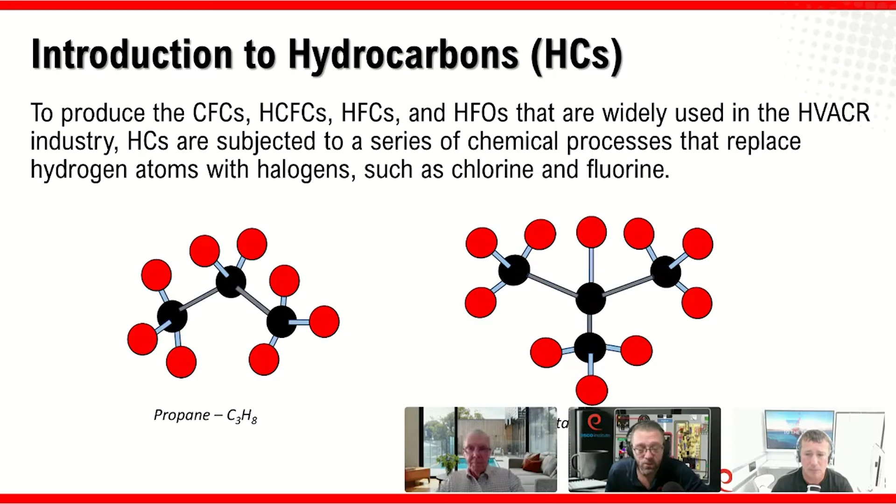So in a lot of these refrigerants, you're going to see two of the primary components in the refrigerants you're using today, carbon and hydrogen. The only difference is some of those hydrogens have been replaced with fluorine, which does bring down the flammability, but it does raise the GWP. If you leave the hydrogens in there, that's where we run into the issue. Okay, now we have flammability, right? But we do lower the GWP of the refrigerant. This is a more natural form of each of these substances.

But I do want to make abundantly clear, this is not the same propane that is in your grill in the yard or the same isobutane that is in your cigarette lighter. They are refrigerant grade chemicals. They have been purified to AHRI Standard 700, so they don't have any odorants. They don't have any other contaminants in there, no other hydrocarbons. If you were to look at the two under an electron microscope, regular propane and refrigerant grade propane do not look very similar to one another.

Okay. That's good to know. Meeting the purity standard is critical. Exactly. Because if it doesn't meet the purity standard, there's going to be moisture in the refrigerant, and all of a sudden it's going to be contaminating the system and causing corrosion inside the components. So, for example, propane has multiple grades. You could have heat or fuel grade. There's a chemical grade. There's a refrigerant grade. And what changes is the percentage of impurities that are removed, correct?

So in its naturally occurring form, you may have other hydrocarbons present, or you may have mercury or some other chemicals that are present in there that have to be filtered out. And again, depending on what it's being used for, it could be heat grade where we're burning it. It could be chemical grade. It could be industrial grade, or it could be refrigerant grade.

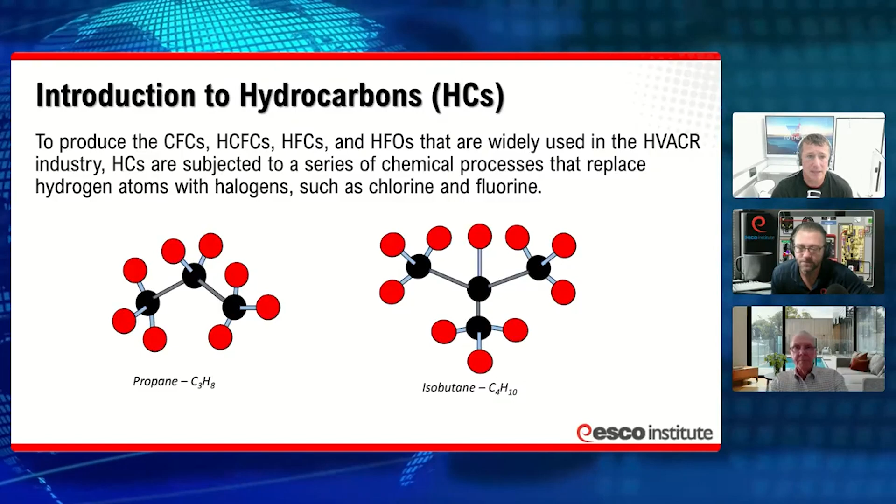So a lot of research, a lot of science, a lot of safety precautions have gone into this, and that's why we need to know what the safety precautions are. And that was really the goal behind this project, to prepare us for safely handling, working on, and disposing of these next generation of refrigerants.

So there's no federal requirement that says you need to take this training on this refrigerant. Right. There's no restriction like we have with our 608 card to buy all of the CFCs and the HCFCs and the HFOs. You don't need that for propane. These are exempt refrigerants. It would behoove you to obtain some sort of training before you start working on this. I mean, it could end very badly for you. Yeah, there's plenty of videos online of that happening.

So we're trying to say, listen, here's the information. Here's what you need to know. We've done all the research. We've got cooperation from the manufacturers, and we're trying to present it to you in a manner that you can take it all in and say, okay, I feel comfortable now.

I would say the goal of this is to quench the fear. If you're working with electricity, you shouldn't fear the electricity. You've got to respect it. That's the safe way. Same thing with this refrigerant. When you see the big scary sticker on there, you can't have that fear, or you're going to make a mistake. So we want you to feel comfortable with this.

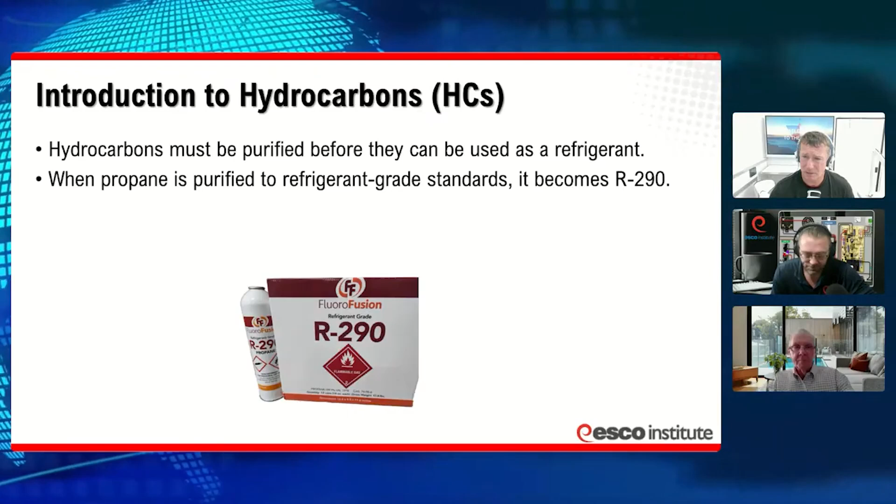Yeah, because especially in commercial refrigeration, even a lot of our smaller ice machines, I think under 250 or 300 pound, they're all going A3. All of your ice chests that sit out in front of gas stations, the Leer ice chest, I talked to Leer some months back, and they're all A3 highly flammables now. So the hydrocarbons really are moving into the refrigeration sector quite rapidly.

Yes, when you walk in to work on a system that's hydrocarbon based, the leak detector should be turned on before you even walk into the building or the space where the unit is, because if there's any leak, it will start to detect it. The leak detector should not be shut off while you're working on the equipment, so that you know there's been no problem with any leaks while you're working.

The other issue is these are heavier than air, so they're going to collect along the floor and in low places. True, I hadn't thought about that. They're not going to naturally dissipate like natural gas would. Right. These refrigerants are going to collect on the floor. So some sort of mechanical ventilation with an intrinsically safe fan to move air through there. There was actually one case manufacturer, I believe from Europe, who decided that to prevent collection, they would leave the condenser fan running all the time. Makes sense.

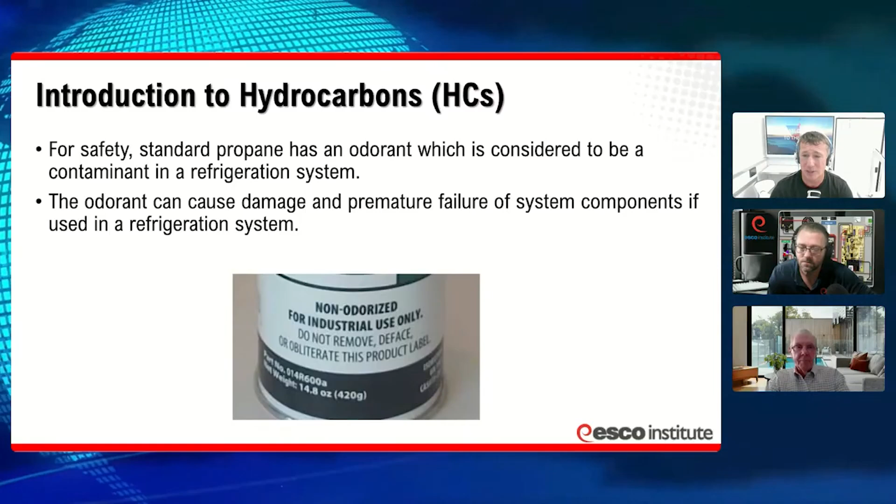Jason had his own experience with people not understanding the flammability of refrigerants and not understanding the quantities of refrigerants, and ran into a scenario where he wasn't even allowed to work on a piece of equipment inside of the building. They wanted it outside, they wanted it out of view. And that's not really the case. Understanding what the actual safe handling and safe practices are is what will get us all forward.

I will point this out though, that there are a lot of spaces still today. If you have a 290 system, a 600A system, let's say a college campus, you have a cafeteria, you have the kitchen, and you have these refrigerators and freezers. And if they're 290 and they need to be repaired, there's still a requirement that your company come pick it up and take it off location, repair it, and then bring it back.

They don't let you fix it on the location, which I find pretty funny because the person that's going to load it onto your truck is driving a forklift that has a 30-pound tank on the back that they're burning, correct? That's right. There's 2.6 ounces in this unit. But a lot of the college campuses and certain data centers and places like that, they have a requirement where you come pick it up, put it in your truck, remove it, leave a loaner possibly while you work on the unit, and then bring it back.

Yeah, absolutely. One of the questions came in from Paul is, what is the max charge in a unit currently? I know there's some information on that later in the presentation. So we've got to be a little more specific. Are we talking an open case, residential, commercial? If it's an open commercial case, you're allowed 494 grams, which is 17.4 ounces. A little over a pound. I just opened the book next to me. It's still quite a bit of refrigerant.

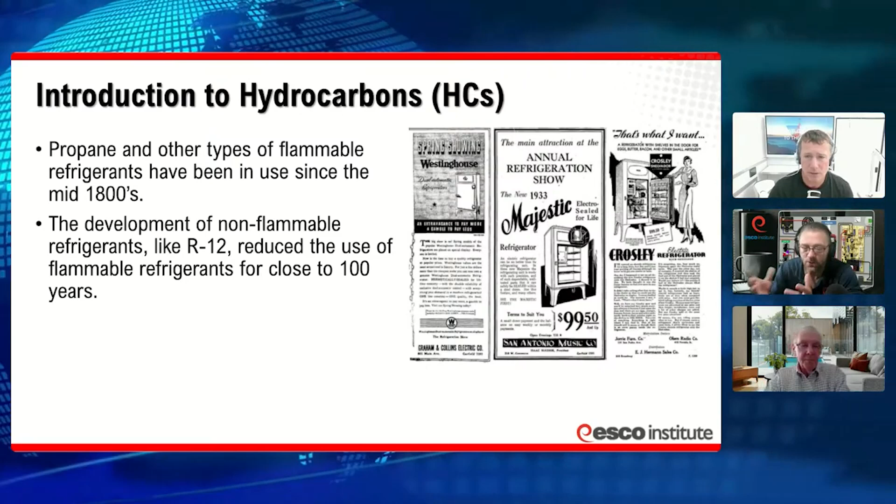So you're right, it does really matter. The controls have to be intrinsically safe and certified to work with those refrigerants. If you're below the lower flammable limit or above the upper flammable limit, it won't ignite. So you could have an instance where there's been a leak and it's been contained and you're way above the upper flammable limit. Then all of a sudden you open the door, and you've changed the mixture inside that cabinet by introducing air. So you have to be very careful to use the proper controls.

Yeah, we've actually had quite a few reports. I did some research probably 6 or 8 months ago on some residential refrigerator explosions around the country. And at least on 2 of the ones I researched, the evaporator fan motors had been replaced by a contractor with non-intrinsically safe motors. They just put in standard shaded pole motors, which had enough arc on startup to ignite the gas leak in 2 of them. But those were systems that had leaks and had wrong parts on them.

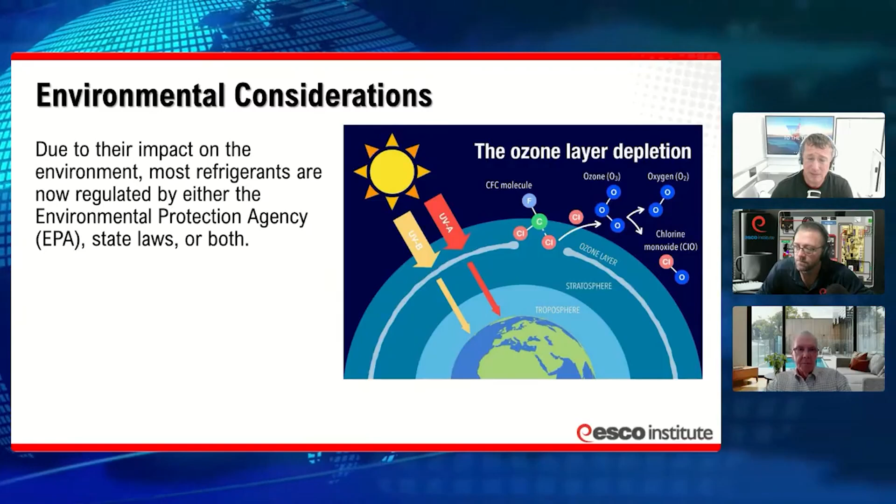The chances of finding that are slim, but all it would take is one improper repair, installation, or service, and then we do have some of those potential issues. And as we mentioned previously, one of the main reasons we're looking at lower GWP or natural refrigerants, including CO2 as well as these highly flammable A3s, is the environmental impact. Looking at ways to use more environmentally friendly refrigerants. So going forward, we're going to see a lot more use of these natural refrigerants.

So you're looking at 600A and 290 for a bulk of this. Yeah, a lot of these other refrigerants, those that we are very common with, are, if not already gone, on the phase down. You got to remember, we are in an HFC phase down currently. We will be through 2036. In 2028 will be the next step. So at the end of 28, January 29, we'll be taking that additional 30% step.

That's a cliff right there. That is the cliff that everyone's worried about. Yes. Exactly. And so that just really gives us a few years to make a pretty swift transition into other refrigerants, because some of these higher GWP refrigerants like R22, gone, hasn't been made since 2020. R134A, out the door in residential, in automotive, in refrigeration. 404, out the door. That was our low temp freezer refrigerant.

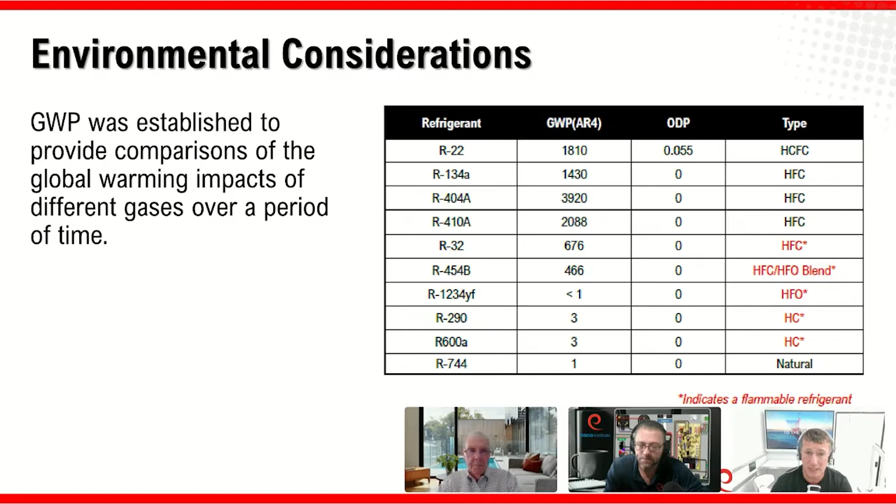They've been out for a very long time, since the 1960s in some of them, but we haven't utilized them as standalone refrigerants and blended refrigerants until recently. So we're doing a lot of watching and monitoring to see how the HFOs actually do long term. But a lot of those are A2Ls as well.

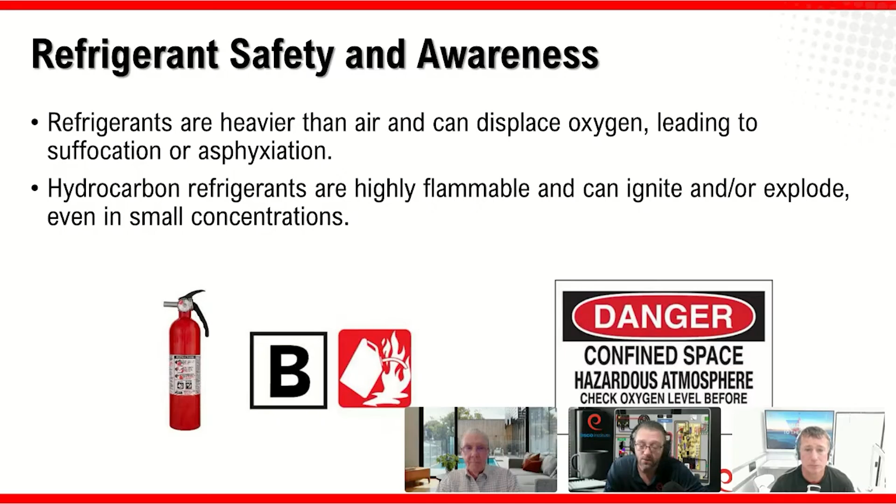Exactly. Yes. So moving forward, most of the refrigerants that we're going to deal with are going to be flammable in one form or another, either A2L or A3. You have ammonia, you have CO2, 290, 600A, and a lot of the HFOs like 1234YF, they all have some degree of flammability. Mm-hmm. Yeah, absolutely.

And for those that are not familiar with the word intrinsically safe, I know we've been using it a little bit more over the last few years in the residential applications as we move into A2L training. As we move into these A3s, it's very important to understand what that means. So an intrinsically safe component is something that is tested and certified that it can't be an ignition source in a flammable atmosphere.

So any kind of motor, any kind of contactor, anything that's certified intrinsically safe, all of the arcing, all of the contacts are sealed in some sort of enclosure to where even if there was a natural gas or a propane leak, it could not cause ignition, which is why when you were talking about the refrigerators earlier, when they swapped the motors out, that motor just turning on was enough to ignite it. But an intrinsically safe motor, everything's in an enclosure and it can't be an ignition source in a flammable atmosphere. That's what intrinsically safe means.

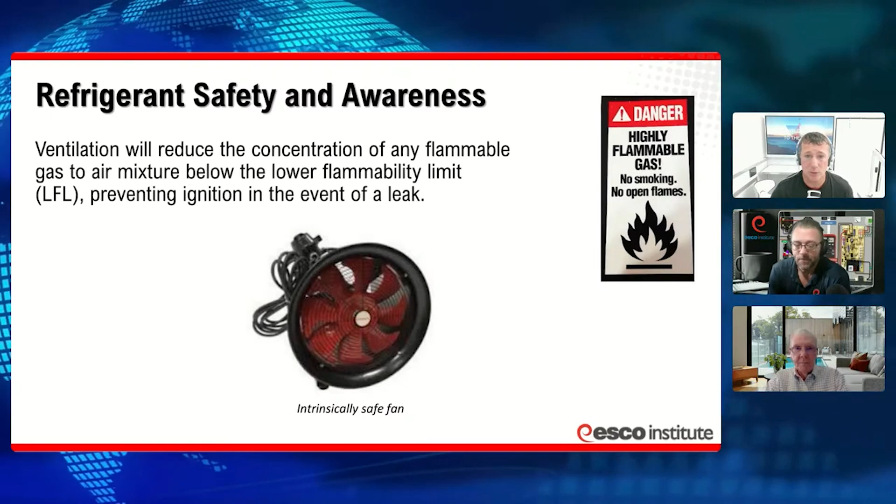Awesome. Yeah, thank you for that, Jason. I just think it's a very good point to bring up for those who may not understand what that actually is.

This is what Murph was talking about. Yeah, this is what I was talking about before. If you go into a work area, you have to have your leak detector turned on. We have refrigerants that are heavier than air. They can fill the room. But with the amount of refrigerant that's going to be used in these particular 290 cabinets and 600A cabinets, it's probably not going to reach the lower flammable limit, depending upon the space that it's in.

But you still need to have the leak detector on, because if you're starting to work on a piece of equipment and the condensing unit is on the floor and you lay down on the floor next to it and it is in a small, let's say, storeroom, you could wind up being asphyxiated.

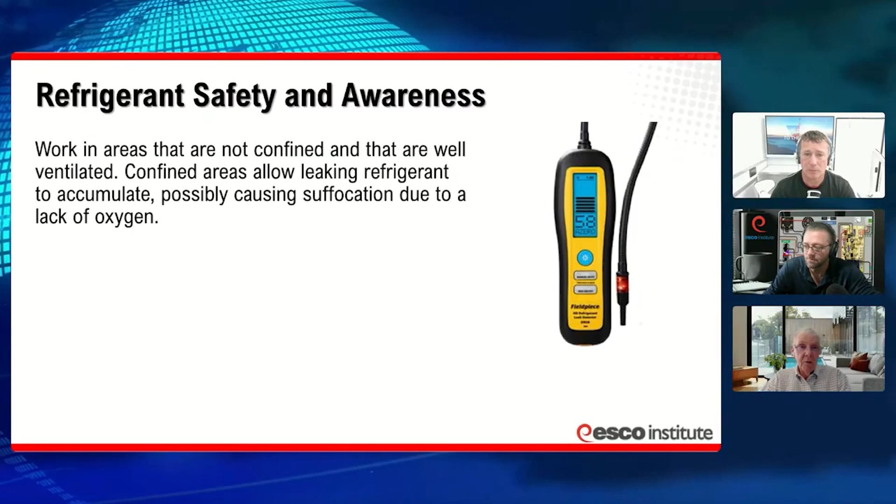Exactly, because you're breathing in nothing but the propane. So the first thing you do as a safety factor: before you walk in the door, you turn the leak detector on so that it's sniffing regular air. And as you walk into that room, you're going to get any leaks that may be there. It may have already dissipated, and when you get to the unit and tap into it, there may be no refrigerant whatsoever, and the leak detector's never gone off. Right, and it actually served its purpose.

I've talked to quite a few different tool manufacturers in the last few months, asking what they're doing to prepare for this, and it was interesting. I'm glad Paul mentioned the leak detectors earlier, because some manufacturers decided they're going to produce a different leak detector with different parameters than their combustible gas detector, designed more specifically for the lower LFLs of the A3 refrigerants. Other manufacturers decided to incorporate that sensor into their new refrigerant detectors so that it covers all classes, A1, A2, A2L, and A3. So it will depend on the manufacturer.

We've been throwing around the words A1, A2L, A3. What does all of that really mean? This comes from ASHRAE Standard 34. A and B are for toxicity: A is low toxicity, B is high toxicity, and the flammability is the number 1, 2L, 2, and 3. So if I'm a refrigerant manufacturer and I want to sell a refrigerant to the public, the first thing we do is send it to ASHRAE, and the first thing they do is set it on fire.

I mean, that's a job that I probably would be good at. That'd be good fun. Yeah, that's something I think I would want to do.

But they're looking at things like burning velocity, heat of combustion, LFL. And based on how it performs in the flammability test, it gets grouped into one of these buckets. One thing I like to point out is that ammonia is a B2L, B for toxicity. When I say ammonia, the first thing that comes to a lot of people's minds is, oh, that's toxic. Yes, it is. But it could also be flammable. It's a 2L refrigerant. When we classify these refrigerants, it's which hazard becomes acute first, and it's the toxicity that becomes acute first.

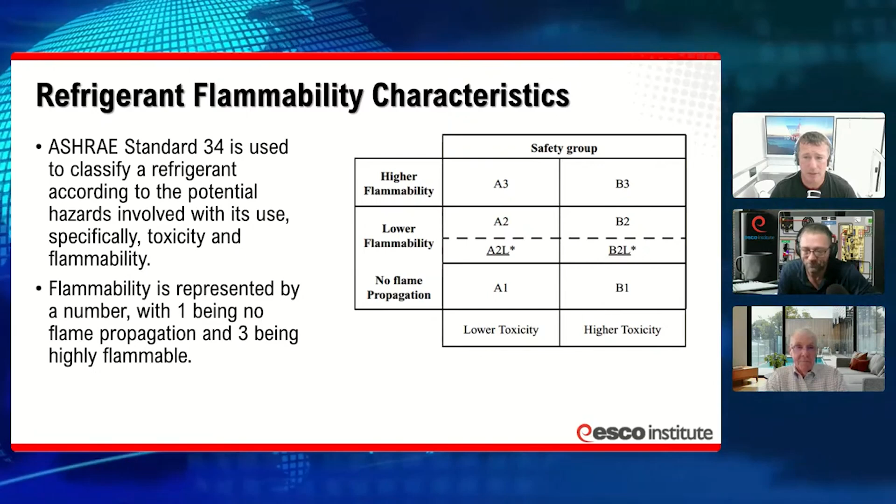So we have been working with a version of a 2L refrigerant for quite some time, because ammonia has been out there for decades. I don't think they ever stopped using ammonia. No, that's a 100+ year old refrigerant. And it brings up another point I thought we should mention real quick.

Another reason we're seeing so many more applications of these A3 refrigerants comes down to what the manufacturers can produce. If I'm a refrigerant manufacturer, I'm given, as Jason says, a piggy bank of GWPs. This whole phase down is not based on pounds of refrigerant. It's based on GWPs as a physical component, as a noun. So manufacturers of refrigerants and equipment look at what will be most cost effective for the end consumer. So yes, we're increasing the flammability, but we're generally able to reduce the cost of the refrigerant significantly over previous generations.

We would have seen 134A in a refrigerator a few years ago. Very common refrigerant for medium temperature applications; I've seen it in some low temp, but primarily medium temp. Most refrigerators, residential or commercial, used 134A. Now, if we look at R290 with a GWP of 3 and 134A with a GWP of 1,430, as a manufacturer I can produce a lot more R290 than 134A. Prime example, 744, CO2: I could produce either 1 pound of 134A or 1,430 pounds of 744, based on the GWP allocation.

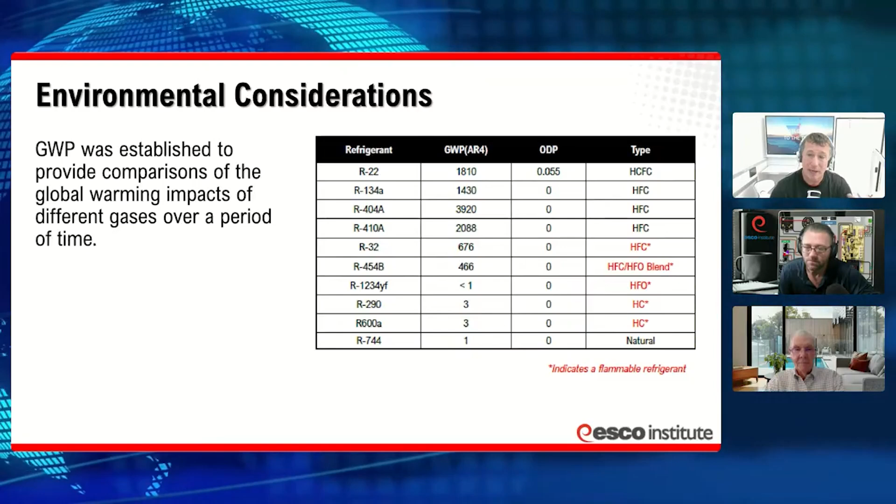So the cost of the refrigerant is typically lower as we get into the lower GWP, especially these naturals. I think it's important for people to understand that it's not based on pounds of refrigerant. It's truly based on GWP total for the chemical manufacturers. They get a deposit into the bank of these credits, and each tank of refrigerant they make is a withdrawal from their credits. And the amount of the withdrawal is the GWP. So if I make 290, it's a withdrawal of 3 credits.

If I make 134A, it's a withdrawal of 1,430 credits. When I'm out of credits, I'm done making refrigerant for the year. So as a manufacturer of refrigerants, I have to ask, okay, what do I want to make? What can I make, so that I have enough credits to produce refrigerant until the end of the year in sufficient quantities?

It's up to them how they want to spend the credits, but that is essentially what they're doing. They have to plot and plan how they want to spend their credits to make these different refrigerants. And as you said, you can make way more of this one than that one, and it keeps the cost down.

Sure. And this is a good chart that shows us some of the different refrigerants that fall in some of these classifications that we were just talking about. As you can see, we'll see those R290 and R600As up here as low toxicity, high flammability. And then some of our more recognizable refrigerants we've seen in the past, like R22, R410A, R134, those all are in that lower toxicity, lowest flammability. So we don't have a lot of different refrigerant options, and we have a very small window.

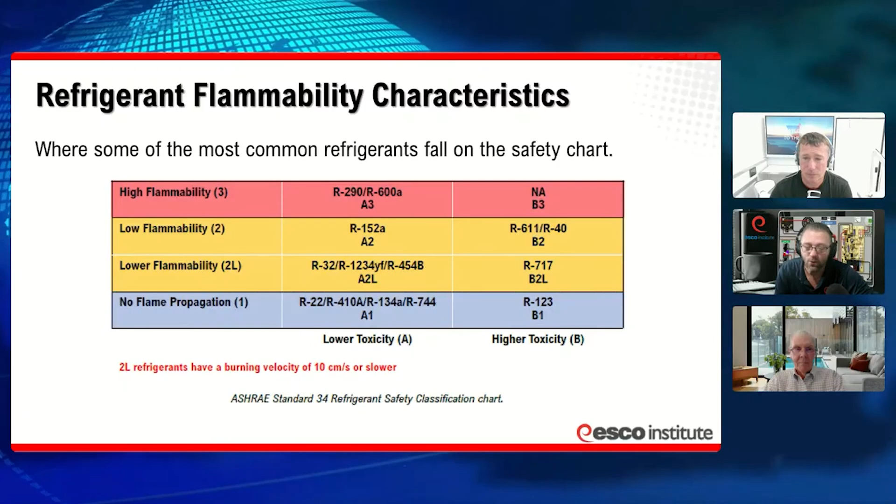I will also point out that a lot of folks like to refer to A1s as non-flammable. That's not true. Right. In a house fire, 410A burns just fine. It's under normal operating conditions, under a very specific set of conditions, they will not propagate a flame. That doesn't mean that they're not flammable across their entire range. Again, in a house fire, whatever refrigerant's in the condenser is going to be fuel for that fire as well. You bet. When we have high temperature, we get our high ignition point, and we have high concentration.

This is a fun chart. I really enjoy this one. I spend a lot of time on this in class when I'm teaching the A2L classes. Yeah. So what we're talking about is, how do we base these different refrigerants? Because even if a new refrigerant comes out, how do we actually compare it? In the actual test standard, we're using refrigerant, air, and ignition to see how much it will ignite.

So when we started talking about these A2Ls, we always say that they're so much closer to A1s because of their ignition point, and this is a really good visual to understand that. The jump from A2L to A3 is incredibly different than going from an A1 into an A2L. This is why there are hard charge limits in place for A3s, and we kind of have a moving target on the 2Ls.

Right. Well, you're looking at that arc, that V that you see on the screen. This is one of the ASHRAE tests when they set it on fire, and they're looking to see, does it break the arc on either side? If you look at the 2L refrigerants in the center there, it barely breaks the arc on both sides. And that first one could be 134A or 410A. That's an A1 refrigerant there, and there's still a flame in that picture.

I try to show this to people and say, yes, this is your A1. You bet. This is a perfect example that they can burn. Under the right circumstances, they will definitely burn. But as you mentioned, the 2Ls are way closer to being 1s than they are 3s. There's a big difference between 2L and 3, which is why we use different tools, different standards, and different charge limits. We can't just take all of these refrigerants, throw them in the flammable bucket and treat them all the same, because they are not the same.

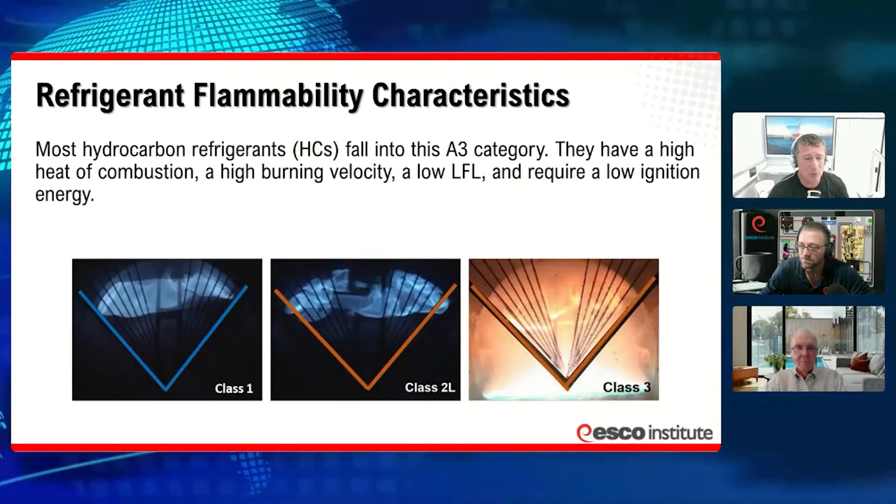So that's why when you're working on a piece of equipment and you know your circuit is just as it's been for anything that you've ever worked on before, as you start to work on it, you've checked to see if there's any leaks. Now it's time to find out what's the matter with the piece of equipment. Well, if it's an electrical control, lock out, tag out, change the equipment, put the proper manufacturer specified equipment in the unit, and then bring it back online.

But if you get to a piece of equipment that's out of refrigerant, but you're not sure, it's not doing its job, but everything else seems to be okay, you can hear the compressor hum. Now you all of a sudden have to make that decision. Well, I guess I have to tap into the system. Sure. And at that point is where most people seem to have the issue with, oh, I've got to tap, this is flammable, it's going to cause a problem.

Well, we've all been tapping into systems for years, before the A1s and the A2Ls. You've tapped into those systems before. And when you tapped into the system, you didn't have a problem. Yeah, the sky didn't fall. Right. The sky didn't fall. So you've tapped into the system. The system doesn't seem to have the right amount of gas in it because it's not performing. You do not top the system off.

You take all the refrigerant out. If you have to, take it outside, or figure out a way to get the refrigerant dumped outside so wherever you're working is not going to cause the lower flammable limit to be reached. And then you tap into the system, same way you've always tapped into a system. You put the tap line on and you figure out, okay, I have a leak. I have to pressure test it. You build the pressure up, you find your leak. You may be using bubbles, you may be using a sonic leak detector, but you find the leak.

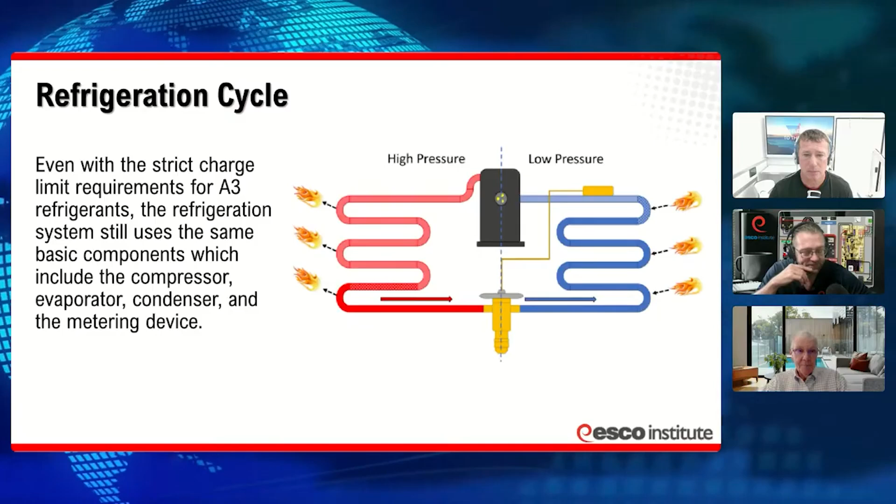When you repair the leak, one of the most critical things that you can do is to run nitrogen through the system as you're repairing any leak. The reason being, there could still be a pocket of propane inside the system, and it could ignite, right? And the oil that's inside the system. You also, if you have to replace a component, you do not take it out with a torch. Oh yeah, great point. We cut them out, right? You have to cut them out, because if there's any residual in there, you're going to wind up with a flame. A flare, yeah. It'll shoot through the entire system and could cause you even more contamination in the system.

When you access the system, you've charged the system. How do you charge the system? These are all critical charge systems. They have a specific weight. It's on the label. You don't go over it. You don't go under it, because you have to have the exact amount of refrigerant in the system to get the proper superheat and the proper subcooling.

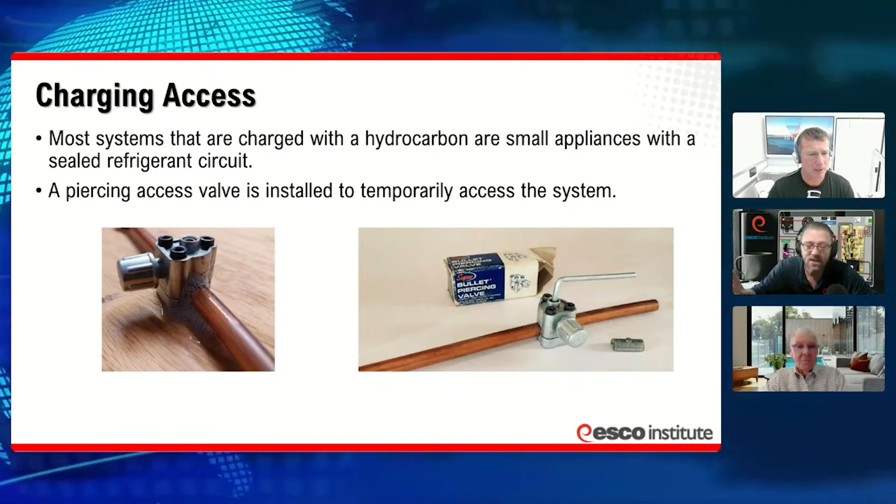I'll say the tools that they have come out with and developed for the A3s are awesome. Yes. They make doing what you said very easy. The scales, you connect the tank, program in what charge you need. There's a solenoid that opens, allows the refrigerant to go in, and you get the exact right charge. They're awesome is all I can say.

Yeah, and I know we cover some of that, and actually we're getting close to the end of the show. So let's talk about some of this access. You mentioned access before, and we've seen some of these photos. Tell us a little bit about what we're going to see on these R290 and 600A systems. The 290 units are going to have red sleeves on them to designate that there's a flammable refrigerant in it. Now, the cap that's on the end of those access tubes is manufacturer installed. I don't know if you can buy them in the field, but you're going to have to take that red sleeve off. You're going to have to tap into the line.

And the tap lines that you just saw, please don't ever leave them on any piece of equipment, flammable or not flammable, because they leak. The manufacturer that I did the training for for 5 years, they bring pieces of equipment back, and the first thing that they see is the tap line is still on, and they pressurize it, and there was the leak. So these are temporary fittings. Yeah, they're not meant to stay, right. Right. You tap it.

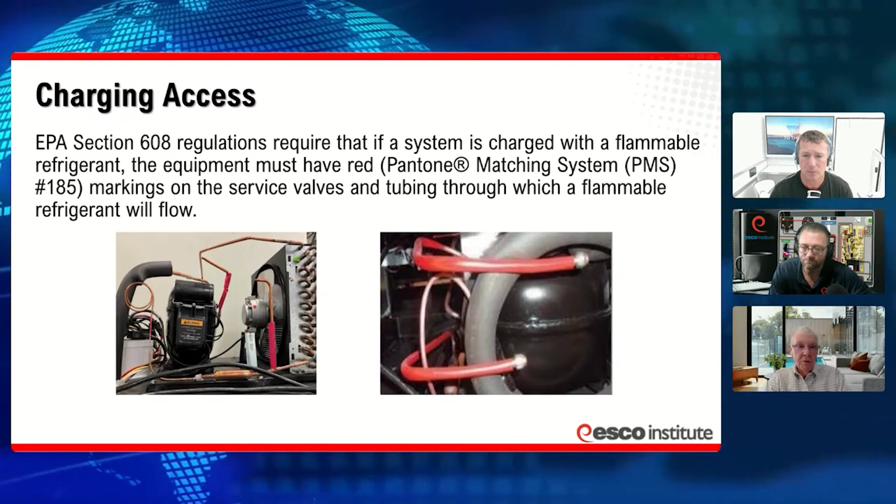If you have to take the sleeve off, you take the sleeve off. You put it back on after you're finished. Charge it by weight with the proper scale. Make sure you don't exceed it. Then let the system run. Let it get down to roughly close to temperature and steady state. After it's near steady state, then it's time to take the tap line off.

You don't use wire nuts. You just don't, because they can pull off. Right. How many of us have seen wire nuts fall off pieces of equipment, no matter what? Yeah, absolutely. So we're going to see different electrical connector requirements. Intrinsically safe. This is that intrinsically safe. Yes.

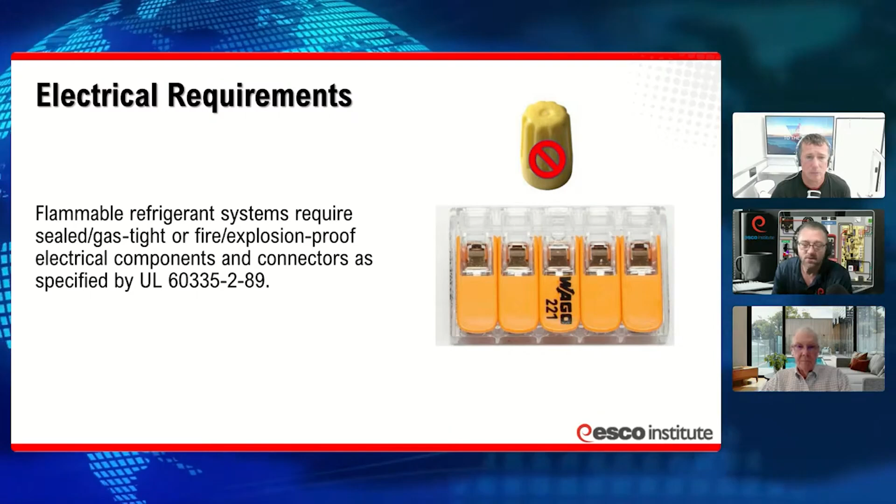There was a question that came up, Clifton, about using what kind of hoses. Yes, going to bring that up. Great question, Paul. We do have images and pictures in the book. They're really small, 1/8 inch. If you're going to use a hose at all, they have a single manifold with a little brass connector. The entire charge of one of those systems would fill into one of those hoses, and you'd empty the entire system if you hooked up a regular gauge manifold to these. So we're using specialized equipment for this, very small; most times there aren't really any hoses. If there are, they're the little 1/8 inch fittings and hoses.

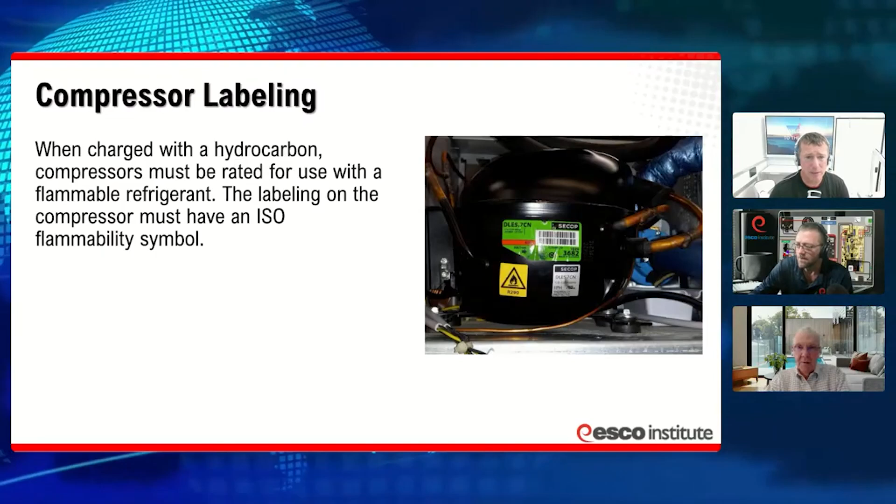Do we have any pictures in the presentation on those? Yes. Okay. Let me hop through real quick and then we'll come back on those, because I think it's a very important question and topic, because there's so much we can cover and we're starting to run low on time. So I want to make sure that we answer any questions that come up. There's a lot of content in here for you. Slide 54. Oh, fantastic. I can jump here real quick.

Just so everybody knows, standards are consensus, open and transparent based, done usually by a trade association, and then a legal entity like a municipality, a city, a state, or a government accepts and uses that standard in their code. So you will find locations that won't allow R290 units. Institutional is a big one, where we see issues even with A2Ls, like a hospital or a jail where people in the structure can't freely move about. They're kind of isolated in an area, and if there is an emergency, there is no immediate access to egress.

So when you get into certain buildings zoned that way, you'll see that they severely limit the types of refrigerants. You'll have to use very small, very segregated individual systems throughout the facility. Instead of one big unit doing the whole place, you might have 50 small units doing the place.

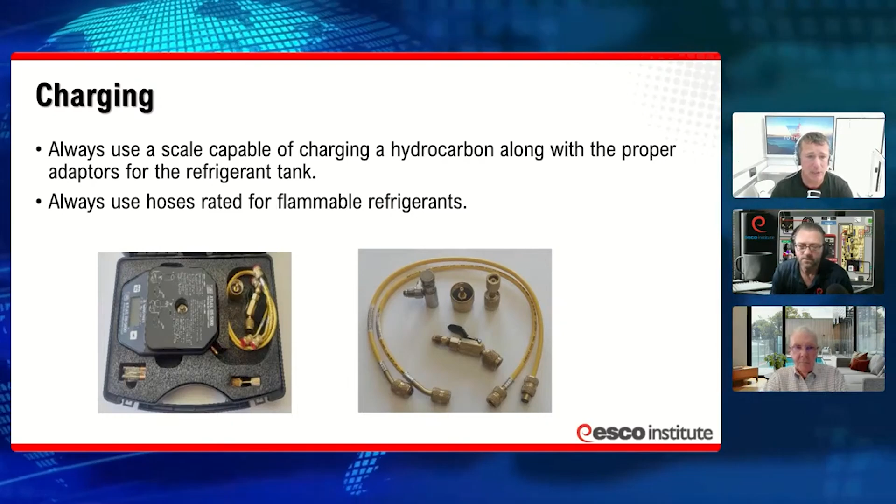This is a really good picture and it helps us understand a little bit about the charging. On the left, this is actually a charging scale for our A3s, and you'll see the tap built into it. We're talking about critical charges, a lot of times in grams now, not ounces. So we are going to be using smaller diameter hoses and scales that have the refrigerant built into them, or ways for it to be connected onto the scale. So there are going to be new tools we'll have to be looking at.

I'm okay with that. I like buying new tools. That scale is awesome. I wish they made a larger version of that for the refrigerants we're using today. But one thing to remember is you still have to purge your hoses, because you've got to get the air out of the hoses. Otherwise, you're just introducing it into the system. Absolutely. You can see the hoses are 1/8 inch there, and we're using little access fittings.

In this particular model, the refrigerant goes through the scale. There's a solenoid inside, and you program in exactly what you need to put into the system, and it will open the solenoid, allow the refrigerant to flow, and then close the solenoid once it's done. Love that. I'd like to start seeing it on our larger applications too. Dude, it's awesome. I really like that idea.

Very cool. We got a few minutes left. Anyone have any other questions?

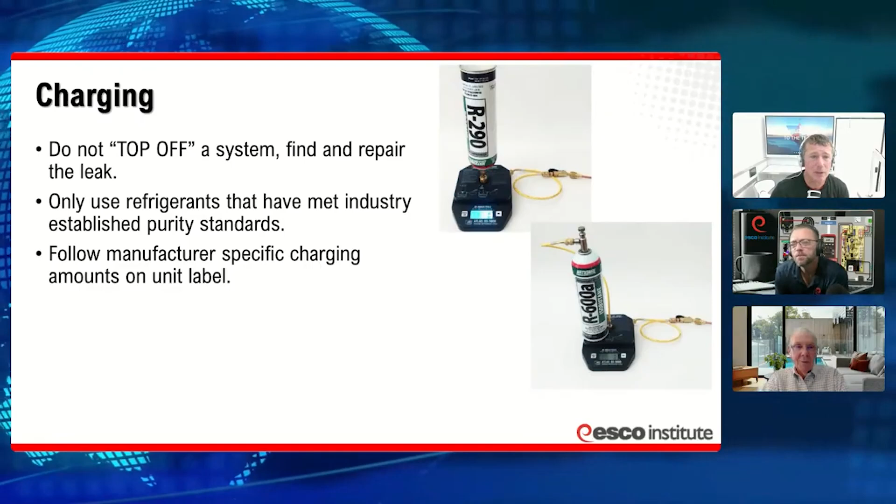One thing that we absolutely have to point out is when you're sealing the system to take off the tap line, you put a crimping tool on, the pliers, and you leave the crimping tool on.

You don't know how many trainings I went to where they said they couldn't braze over the crimped end of the access line because there was refrigerant coming out. And my first question was, did you still have the crimp tool on? Oh, no, I took that off. Right. So you leave it on until your crimp is done, then you braze where you've crimped the end of the line, then you take the crimp tool off, and then you leak check it again to make sure that you aren't leaking any 290.

Another question that comes up, Clifton, is the recovery. In most cases, the hydrocarbons are exempt from the 608 recovery. We can vent them. But it's not just wherever you're at. You don't do it in a commercial kitchen where there's a flat top grill and open flames and all of that. You've got to move the unit outside and vent it that way. You have to do it safely. If you look at what's listed here, it shows you a bunch of the different applications where you're allowed to vent this refrigerant.

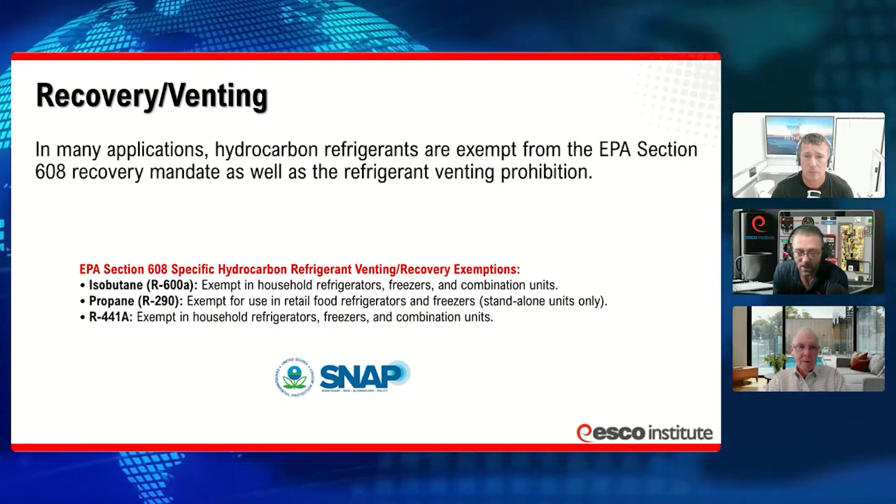I was just getting some more resources out here so I can share some locations for our content. We do cover a lot of the service procedures in this book. Murph and I have gone through this with a fine tooth comb. Do this, don't do this, here's the service procedure to do this. If you're going to recover, you can recover these refrigerants, but you have to have the right equipment and follow the right process of recovery, again following the manufacturer's literature on that.